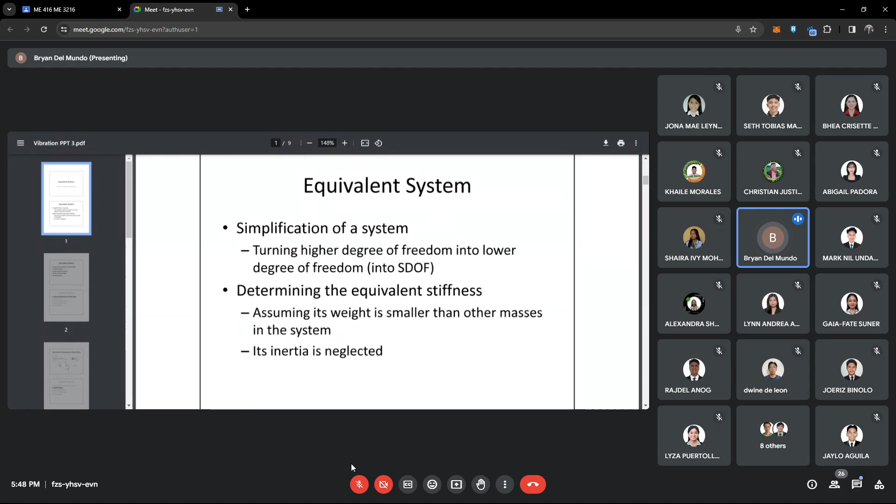So sa equivalent system natin, meron tayong extension or contraction of elastic rods. Ito yung common nakita niyo dun sa deformable. Then meron din tayong cantilever beam, simply supported beam, torsion of elastic rods, at floating bodies. Itong mga ito, before, nadaanan na natin sa deformable.

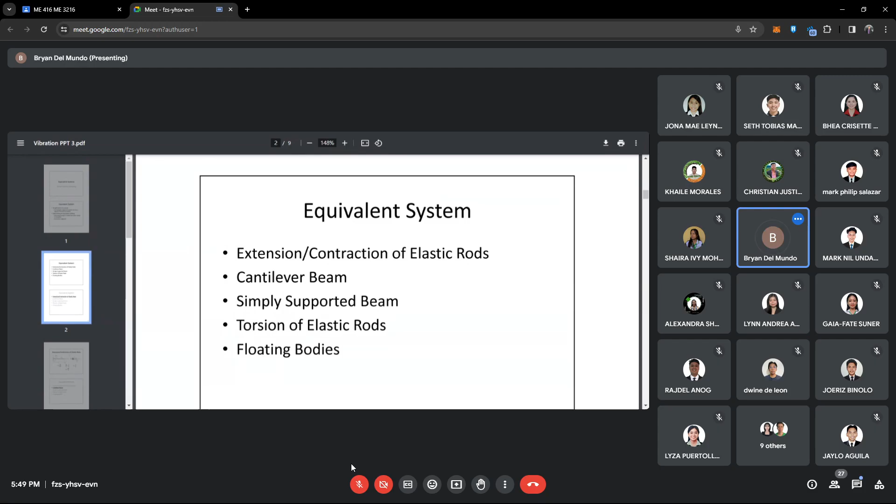So this time, apply natin siya as a spring. Pagdating niyo ng machine design, o kung nakapag-take na kayo, meron tayong tinatawag na cantilever spring at saka simply supported na leaf spring. Meron tayong simply supported at cantilever, pares pa rin naman yung kanilang value ng spring constant.

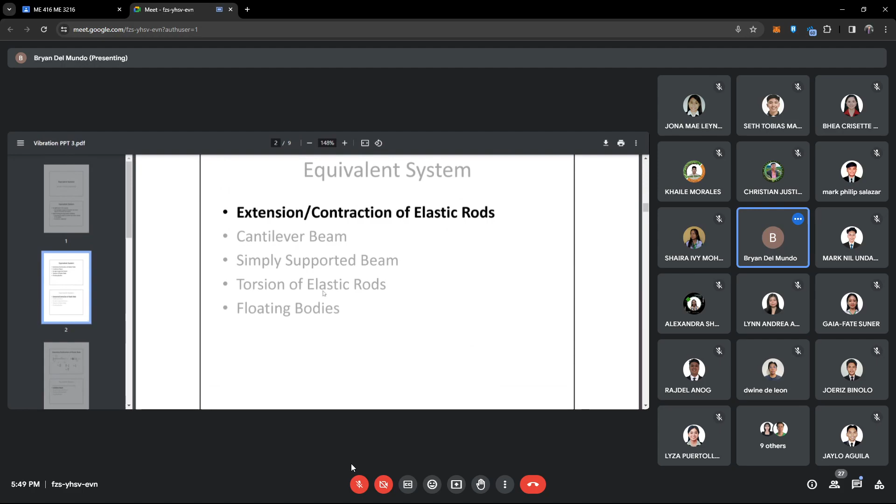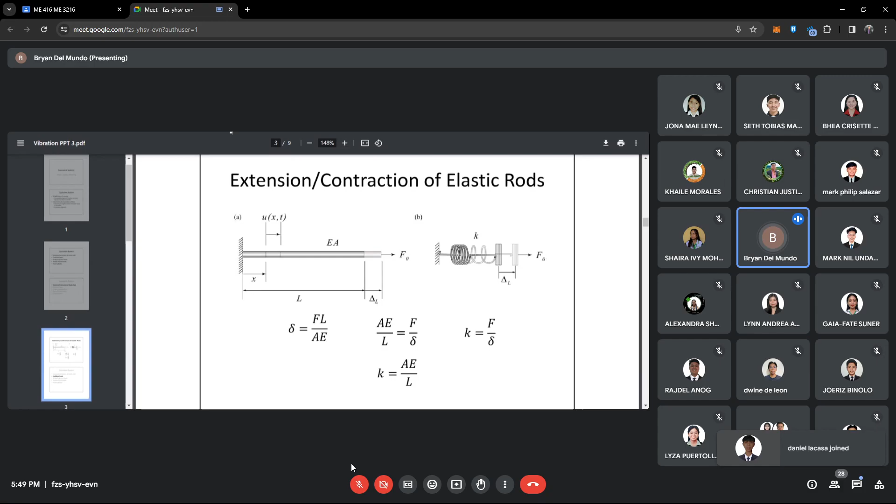So, extension or contraction of elastic rods. Dito, kung mapapansin niyo, meron tayong... i-share ko lang yung PDF natin.

Okay, so meron tayo dito rod, nakafix yung end niya. At yung force na nag-a-act natin dito, kung mapapansin niyo, ito FO. So pahila, meron tayo dyan, kumbaga ang nagiging deformation niya is in terms of tension. Pag nag-apply ka ng force dyan, since nakafix yung end natin, ang tendency, mag-deform yung rod.

Kaya meron tayo ditong deformation, yung deformation natin dyan. At meron tayong elasticity, mga modulus of elasticity ng ating material. At yung area, sabi ko, it's either circular or rectangular. Same pa rin naman yung ating formulas. Meron tayong deformation equivalent to FL over AE.

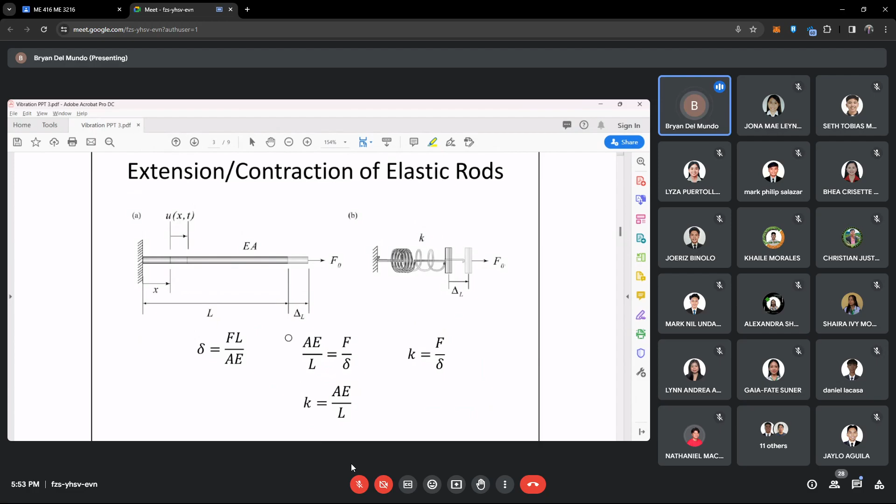So yun lang ang concept natin dito pagdating sa extension or contraction of elastic rods. Meron tayong tension or compressive force, at yun pa rin naman ang components natin. Meron lang tayong, parang nadagdag lang is meron tayong elasticity ng material.

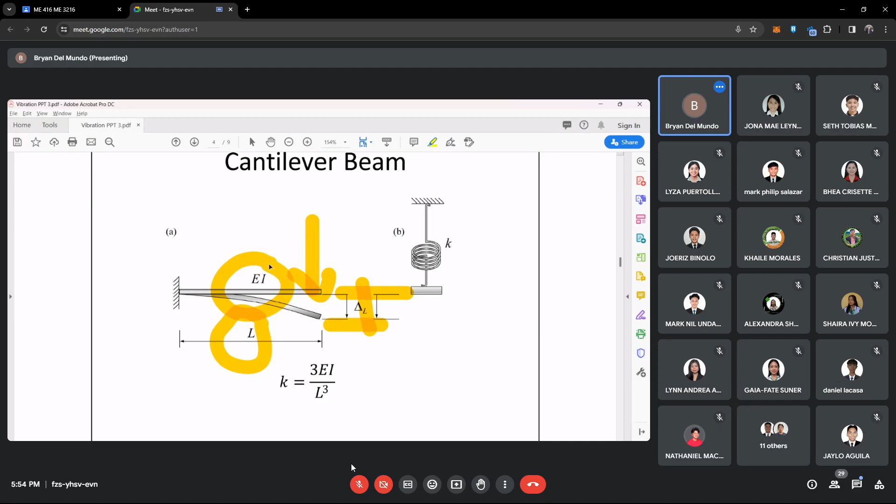So given the length of our cantilever, we still have elasticity and I. So our I here is the area moment of inertia. We have the same representation of I as area moment and mass moment. This time, it's the area moment that applies to us because it's the same concept as in our deformable materials.

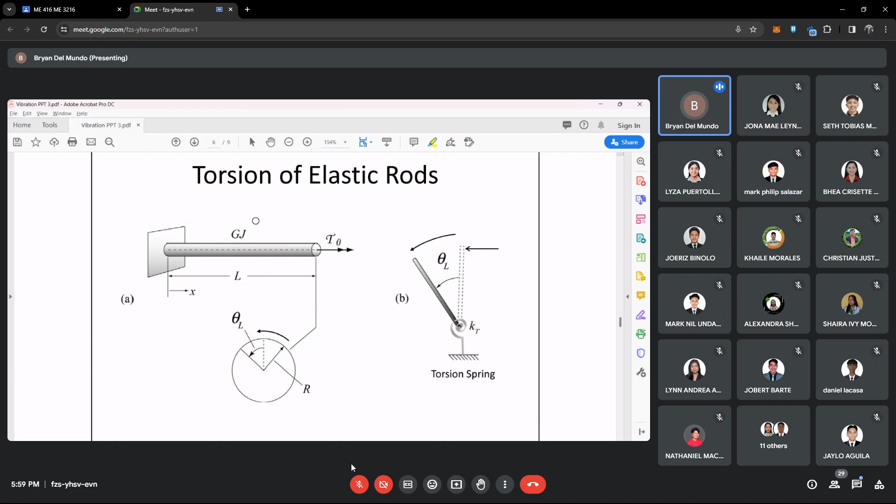So given our radius, what happens here is we now have a new component - JG, wherein our J is the polar moment of inertia. So don't get confused - when it's J, it's polar moment. When it's I, we have mass moment and area moment. Our G is the modulus of rigidity of our material - modulus of rigidity is different from modulus of elasticity.

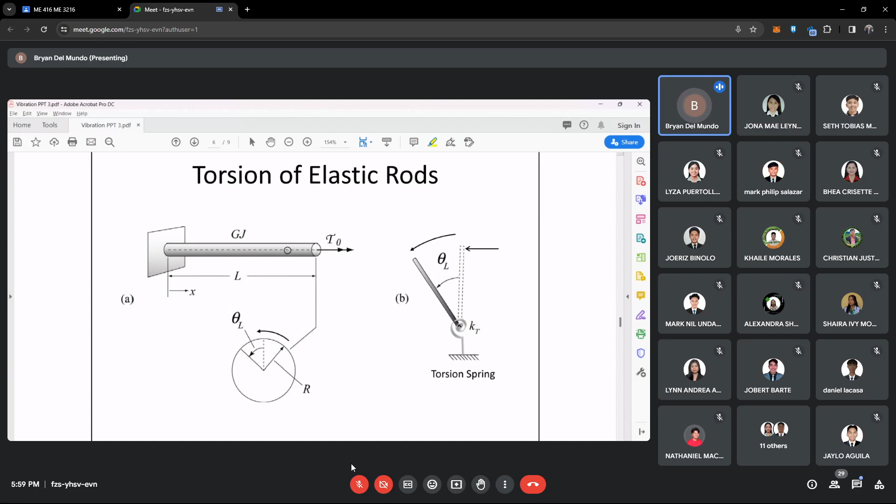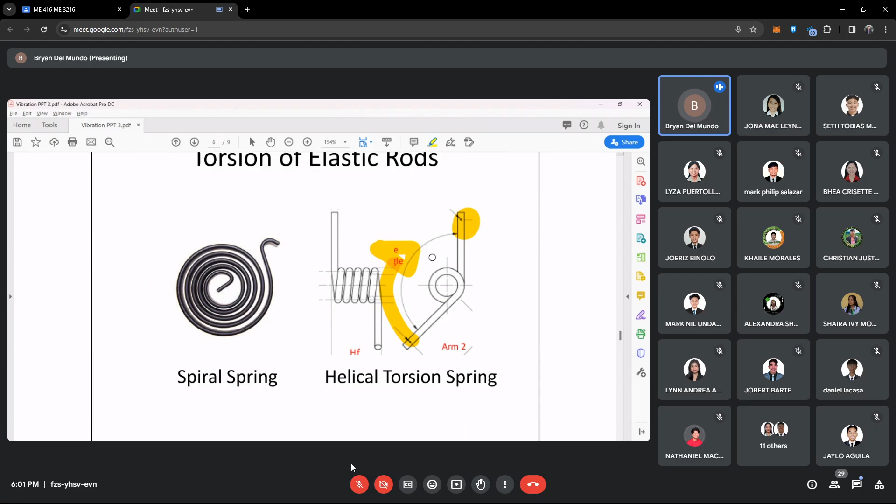And then, ito yung ating helical. Same lang naman sila ng concept, magkaiba lang sila ng itsura dito sa part na ito. Let's say for this one, nakafix ito, kasi kailangan nakafix lagi yan. Then nag-apply ka ng torque dito, so ganun pa rin. Pag binitawan mo yan, babalik lang siya dun sa kanyang original position.

And then, for torsion of elastic rods, Beta natin to. Ganun pa rin naman ang value ng ating K, F over deformation. So this time, since torsion nga yan, mapapansin nyo,

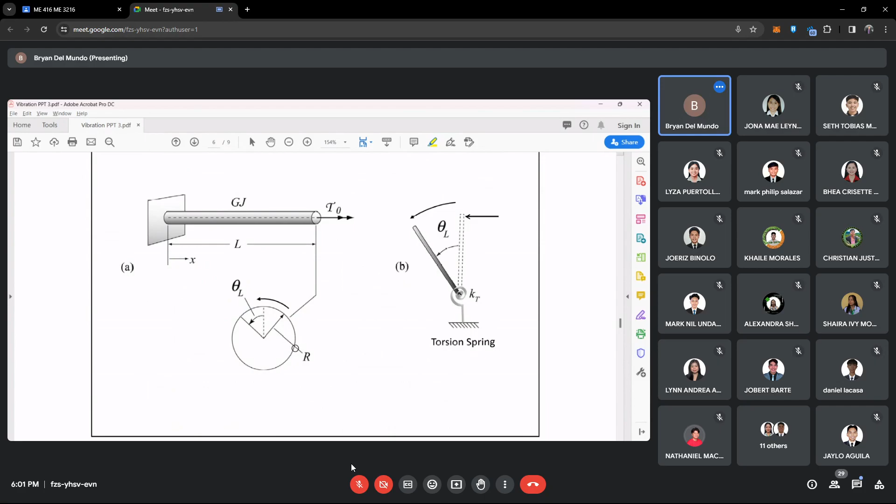kung mapapansin nyo, yung kanyang deformation niya dito is naka-angle theta. Ibig sabihin curvilinear na siya, hindi na siya kagaya ng mga nauna na ang deformation is linear. Ito, sa example natin is para siyang spring mass model. Ito yung mga nauna wherein yung kanyang deformation is linear, kaya yung kanyang K is F over yung deformation na linear.

And then pag torsion naman, ano? So kung sa linear meron tayong F over deformation, pagdating naman doon sa kanyang torsion, yung value ng stiffness ng ating spring is meron tayong torque. Yung torque yung nag-a-act over yung ating theta na angular deformation.

So that T or yung ating torque, ano? Torque yan, hindi siya tension. Wherein yung ating torque is equivalent to yung ating K multiplied by theta, wherein theta is in radians. Lagi naka-radians yan.

So at vibration, meron tayong formula dito. Summation, moment at point O, counterclockwise direction, so same pa rin naman is equals to I alpha. So IM yan, since yung I naman natin na ginagamit dito is yung mass moment of inertia. Kapag ka nagmo-moment, so yung formula ng moment na I alpha, yung I niya is in mass moment of inertia.

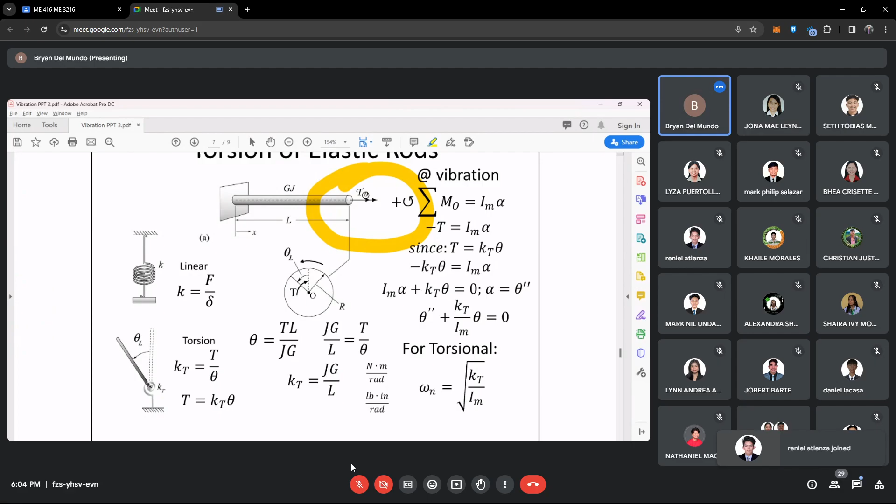Okay. So since T is equals ito, galing dito, so K theta. Substitute itong value na to dito sa ating torque, so that we have here our value negative K sub T or yung ating stiffness times theta is equivalent to I alpha.

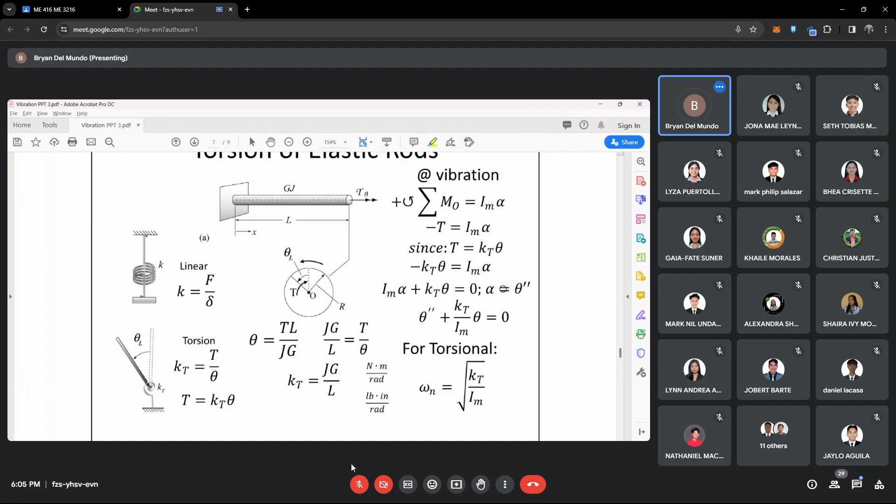So yung alpha natin is also equal dito sa ating second derivative ng ating theta o displacement or deformation. Since alpha is equivalent to theta double prime, substitute lang ulit natin to this one. Pagka-substitute natin dyan, lipat lang natin yung, transposition lang yung nangyari dyan.

So sabi nga nung una, yung value ng ating omega n is kung ano yung katabi nitong ating theta. So meron tayong formula dito ng ating omega n is equivalent to square root of kT over Im. So meron na tayong tatlong value ng omega n.

So hindi kasama sa vibration of rigid bodies kasi hindi siya totally fixed, kasi nagbabago yung depende dun sa figure ng ating given na figure. So yung sa ating spring mass model, meron tayong K over M.

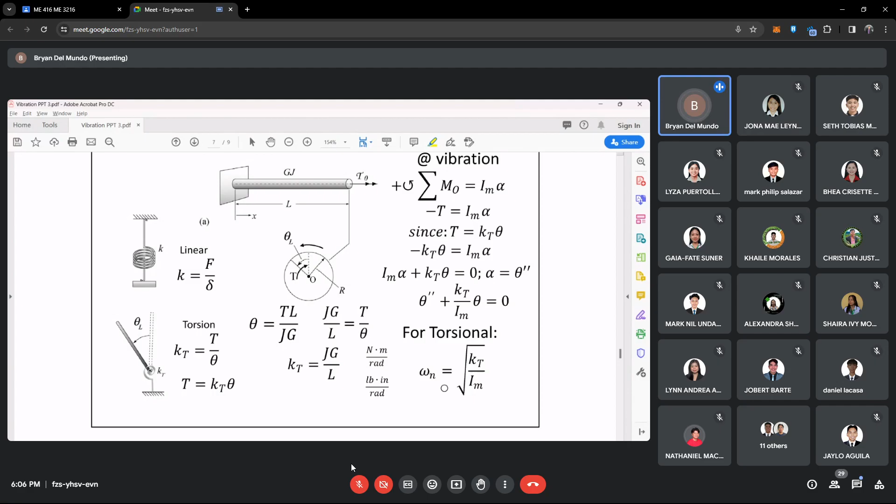So pag linear, K over M. Then kapag ka naman dun sa ating simple pendulum, meron tayong square root of G over L. So kapag yan ay torsional, meron tayong K over Im, o yung ating mass moment of inertia.

Wherein yung unit ng ating K is this one. So sabi nga is mapapansin nyo yung torque. Dalawang unit ng ating torque, it's either Newton meter or inch pound, or pound inch pag English. So over theta, since may theta sa ilalim, automatic meron niyang radian sa ilalim. So lagi ito kapag torsional, lagi siya may radian sa ilalim, yung K.

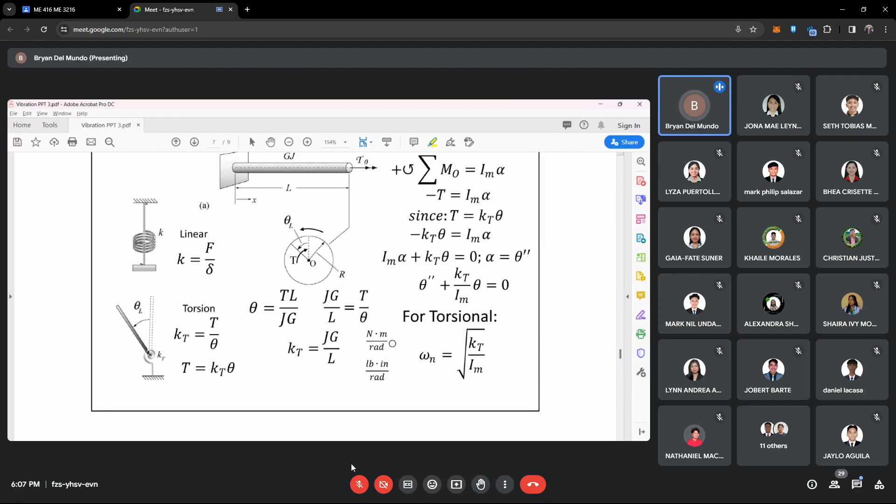Since yung ating formula nga is merong theta sa ilalim, T over theta. So yung radian kasi minsan nawawala, minsan bumabalik. Basta ang formula natin ay ganyan, automatic meron tayong radian. Sabi ko na una, ang radian is para siyang unitless, kaya bigla siya nawawala, minsan bigla din bumabalik.

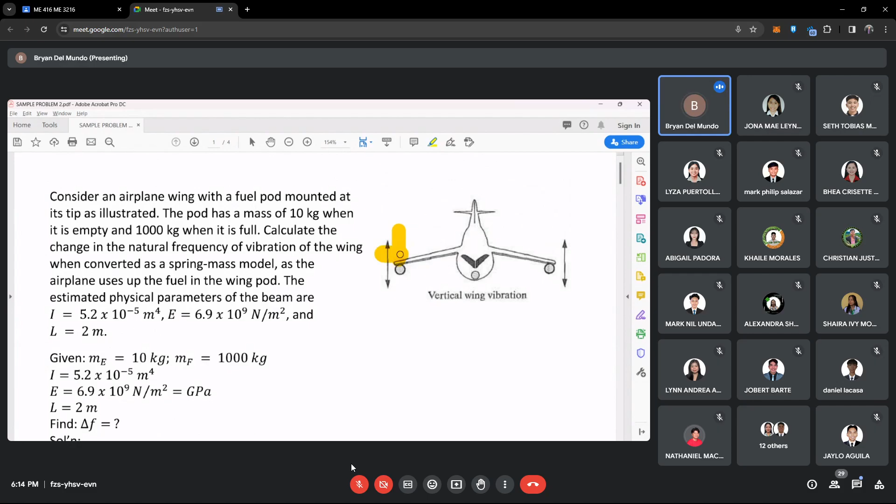When converted as a spring mass model, so this time kung mapapansin nyo, itong part na ito is naka-fix. So yung ating wing. And then meron ditong mass na nag-aact sa magkabila. So considering this one as yung ating, kung mapapansin nyo, parang similar siya dun sa ating cantilever beam. Kasi dito naka-fix yung end natin dito. And then sa dulo, may nag-act na force or mass. So same siya ng concept dun sa ating cantilever beam. So ang nangyari sa ating problem, so habang lumilipad siya, nagko-consume siya ng fuel.

So ibig sabihin gumagaan. And then, since meron tayong mass dito, ang nangyari, nagbabibrate yung kanyang wing. Ang tanong sa atin ngayon is, ano yung change in frequency? Or itong delta F. So change in frequency ang ating hahanapin. So gagamitin lang natin yung ating conditions na, so kapag daw siya ay empty, so when M is empty, when yung pod is empty, M is equals to 10 kilograms, and then when tank is full, so its mass is 1,000 kilograms. Then we have here our parameters, so I, E, and L.

So solution. So solve muna natin yung ating K, or yung ating, we need to solve for the stiffness of the spring or nitong ating cantilever beam. And then, so we have here our formula. K is equals to 3EI over L cube. So 3 times E, wherein our elasticity is 6.9 times 10 raised to 9 Newton per square meter or Pascal. So hindi ko na siya ginawang Pascal kasi para mas makapag-unit analysis tayo. Times yung ating I na 5.2 times 10 raised to negative 5 m raised to 4 over L cube.

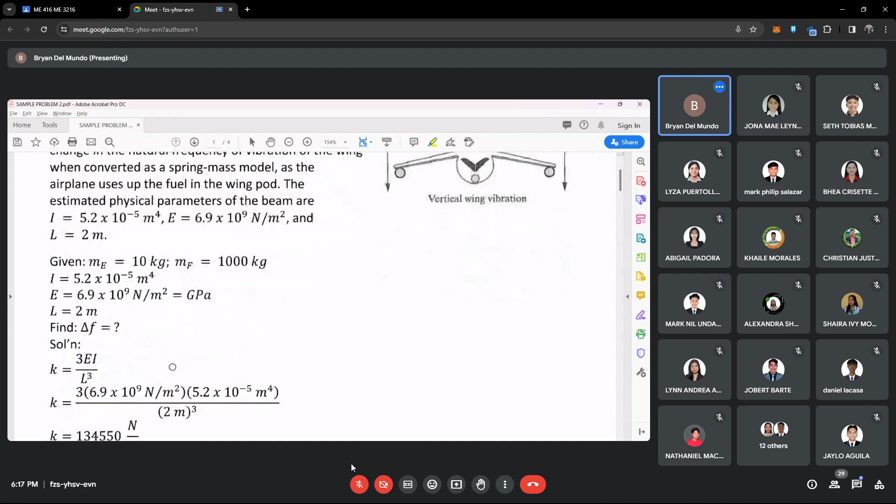Since we have our value of K, we can now solve for omega n. Why does it become square root of K over M? You'll notice in this problem, we need to calculate the change in natural frequency of vibration of the wing when converted as a spring mass model. That's why we used omega n equals square root of K over M.

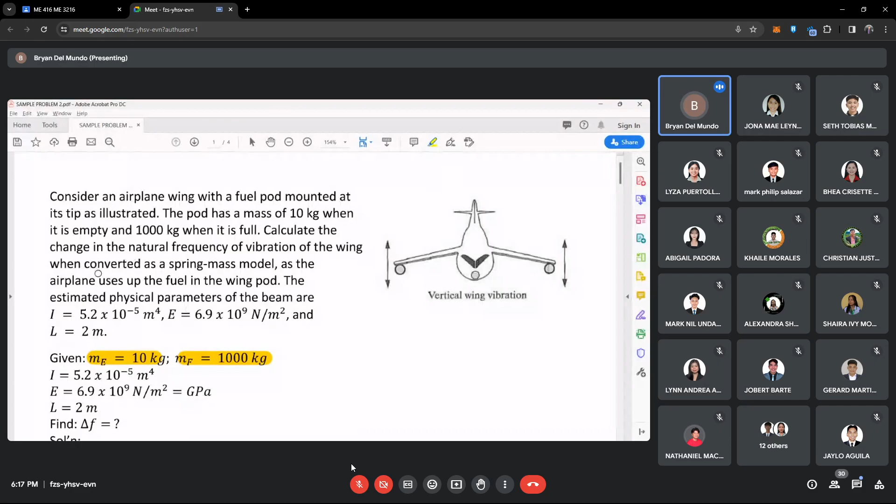We need to evaluate for both conditions - when the fuel tank is empty and when it is full. When empty, it has 10 kilograms, and when full, it has 1,000 kilograms. What we're looking for is the change in frequency, so we just need to solve for the frequency when the given mass is 10 kilograms, and when the tank is full.

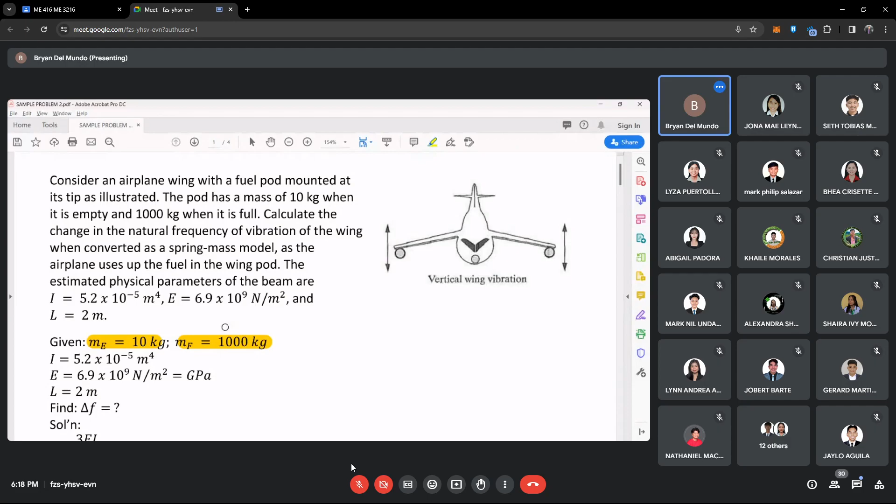For empty, we have the value of K, 134,550 over 10 kilograms. So we have here our value of omega n, 115.9957 radian per seconds.

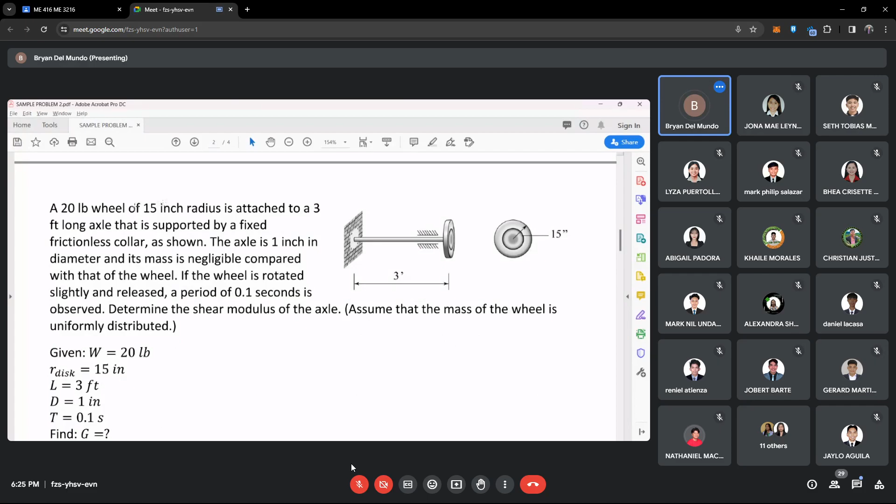Let me pass this to you first. A 20-pound wheel of 15-inch radius is attached to a 3 feet long axle that is supported by a frictionless... okay, let's proceed, this is a new condition now.

A 20-pound wheel of 15-inch radius is attached to a 3 feet long axle. This one is our axle, and it is fixed at this part - fixed at end by a fixed frictionless collar. This is the end. The axle is 1 inch in diameter.

Its mass is negligible compared with that of the wheel. It's also stated that the mass of the axle is negligible, similar to what we said earlier - when we evaluate the equivalent system, we assume the mass of the system is lower in value compared to its weight, or compared to other acting mass. So it's either negligible or its value is very small.

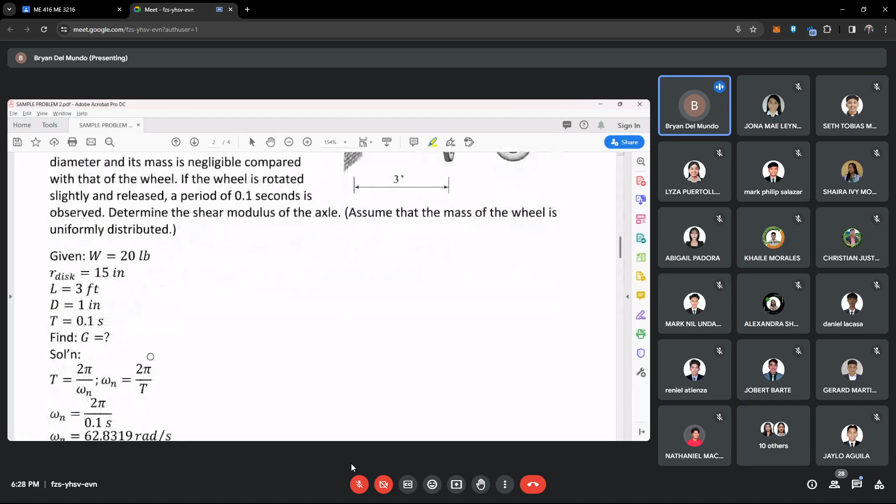So find G. Since meron tayo ditong given na ating period, hanapin muna natin yung value ni omega n. To find the value of omega n, we have here our formula of period is 2 pi over omega n. So substitute, cross multiply, derive the equation. So we have here our formula of omega n is equivalent to 2 pi over T, where T is yung period. So we have our equation, omega n is equals to 2 pi over 0.1 seconds, so that we can get our value of omega n here as 62.8319 radian per second.

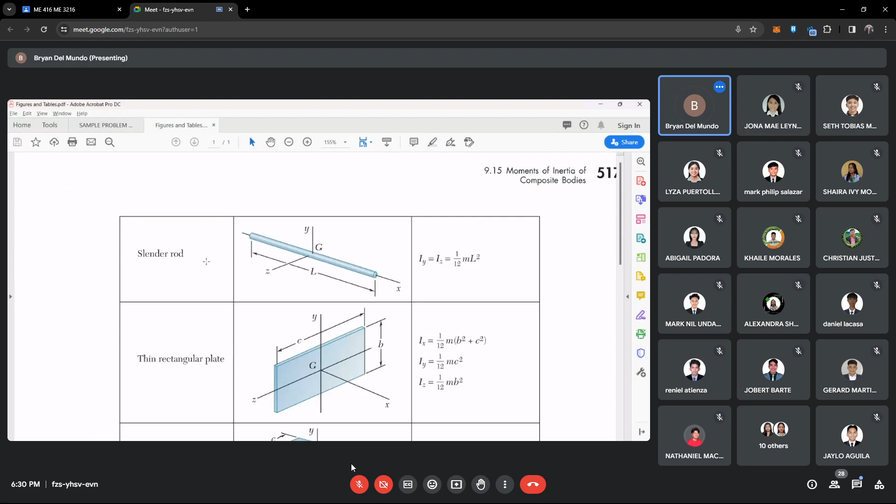So since we have here our value of omega n, we can now find the value of Im and yung K. Since hindi given yung ating Im, wait lang, share natin yung isang table. Okay, so hindi given si stiffness or yung K, hindi rin given itong ating Im, but we can solve the value of mass moment of inertia.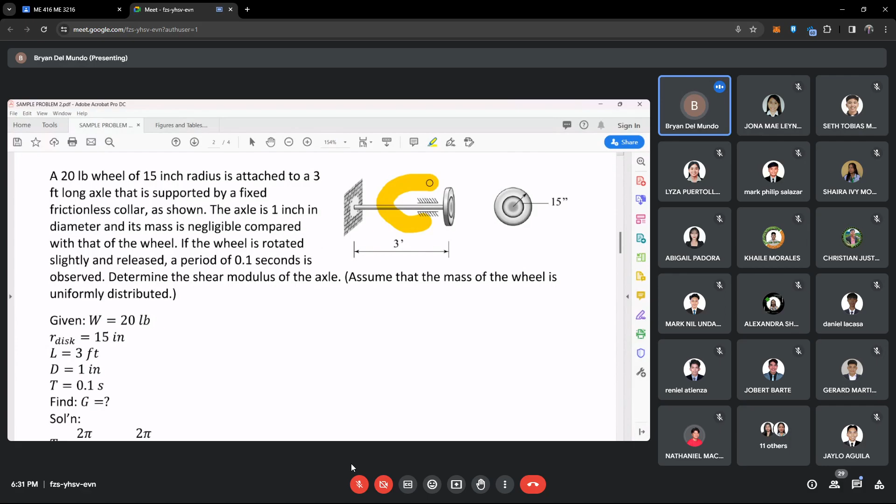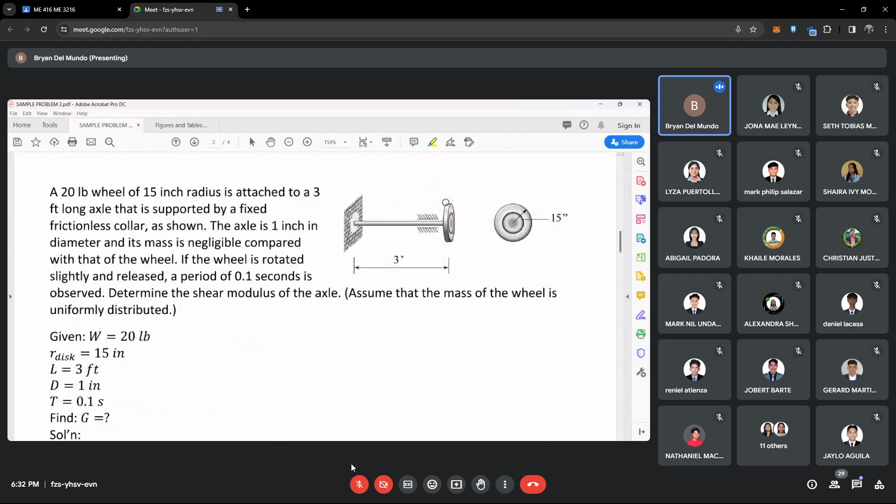Papasok pa doon, and then so we can now solve for the value of I. So 1/2 M, since our given here is naka-pounds, we need to divide it to our value of acceleration due to gravity, or yung ating 32.2 feet per second square, to make it mass, and then times r squared. Since our given here ng ating radius is in inches, we need to convert yung ating inch so that makakancel yung ating inch, we have here the value of F or feet. So cancel itong ating FT, so matitira na lang is itong ating pounds and per second square, but meron diyang matitirang isang feet sa taas, kasi ito ay naka-square. So solve natin, so meron tayong makukuha value ng I, which is equivalent to 0.4852 pound feet second square. Tandaan ng ating unit ng I, pound feet second square.

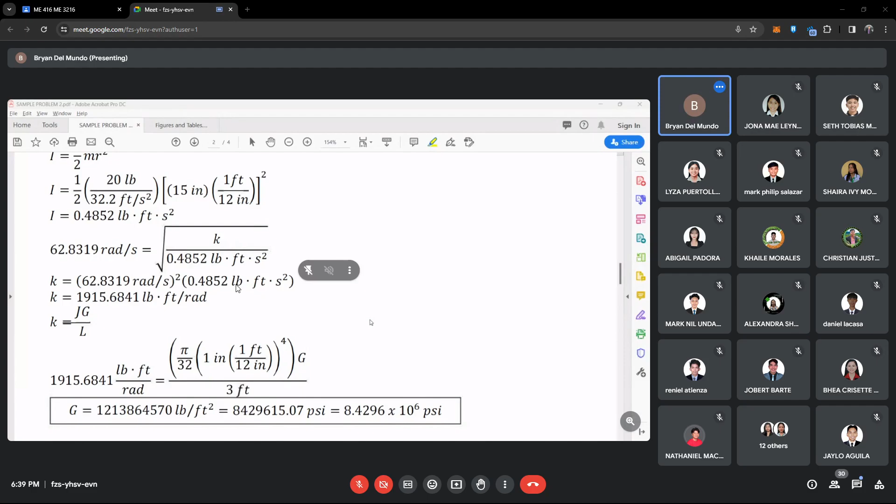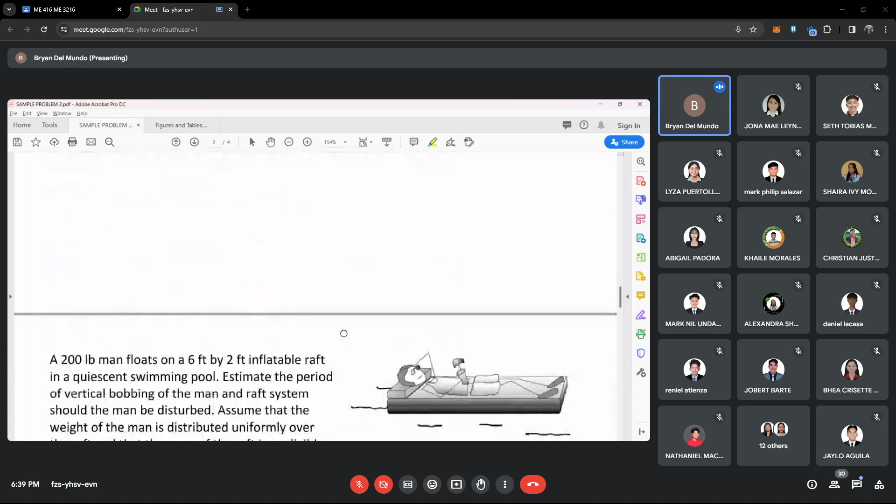So next problem. For example, in our sample problem: a 200-pound man floats on a 6 feet by 2 feet inflatable raft in a quiescent swimming pool. Estimate the period of vertical bobbing of the man and the raft system should the man be disturbed. Assume that the weight of the man is distributed uniformly over the raft and that the mass of the raft is negligible. So our system here is the raft.

And we have our given mass for the man lying down - we have given 200 pounds. So given: weight equals 200 pounds, and area is 6 feet by 2 feet. And find the period - estimate the period of vertical bobbing. The tendency of this is to move up and down, especially when there are waves or when the liquid moves.

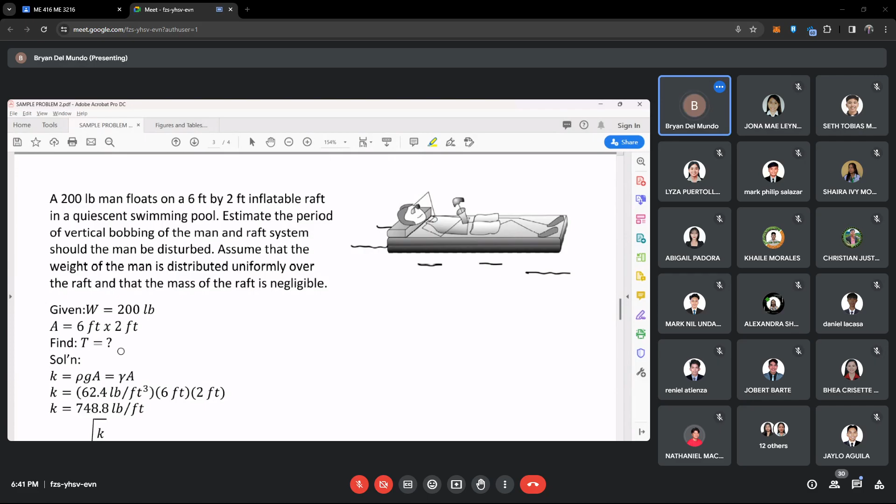So we have here our formula K is equal to rho GA. Since our units here are in English units, the formula is the same. So rho GA is equivalent to specific weight times area.

The specific weight is equivalent to the mass density of our liquid multiplied by acceleration due to gravity. Since the given here is in English units, the density we will use is 62.4 pounds per cubic feet. This is our density.

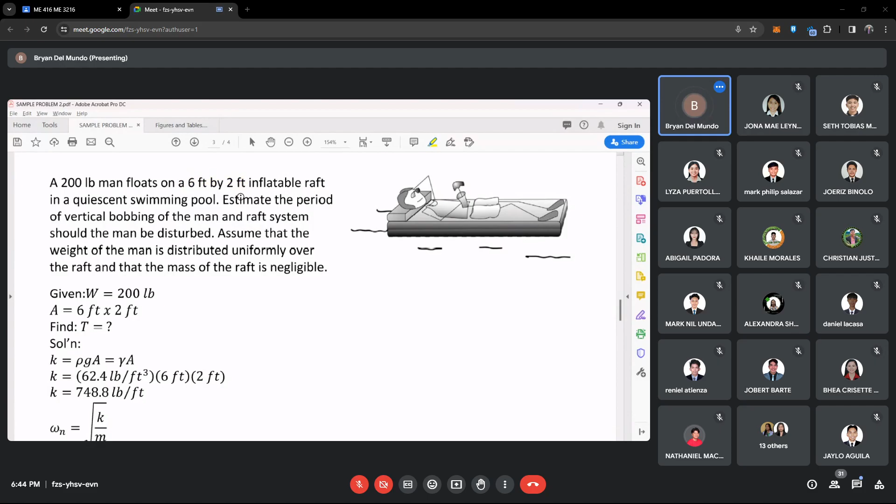So gamma times area. Our specific weight for English units is 62.4 pounds per cubic feet, multiplied by 6 feet times 2 feet to get our area, since our given dimensions are 6 feet by 2 feet. So we can now find the value of K. K is equivalent to 748.8 pounds per feet.

Since we have the value of K, and the weight is given, we can now solve for the value of omega n. Sir, why does K become square root of K over M again?

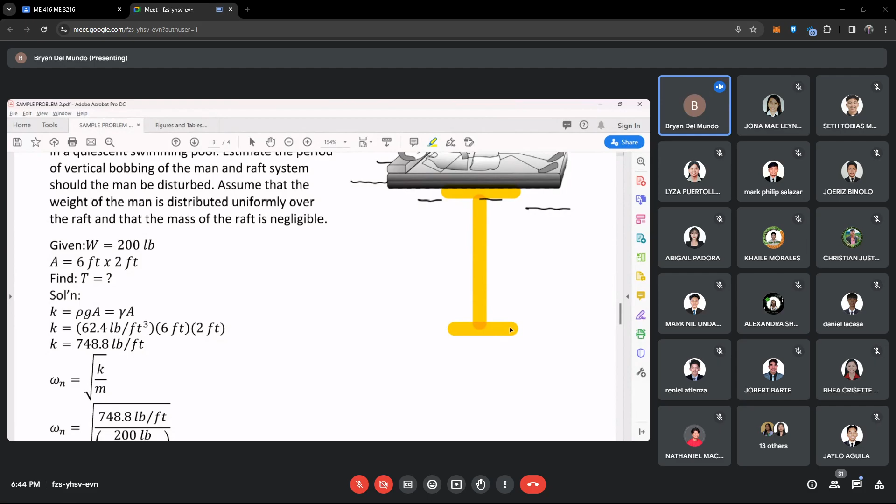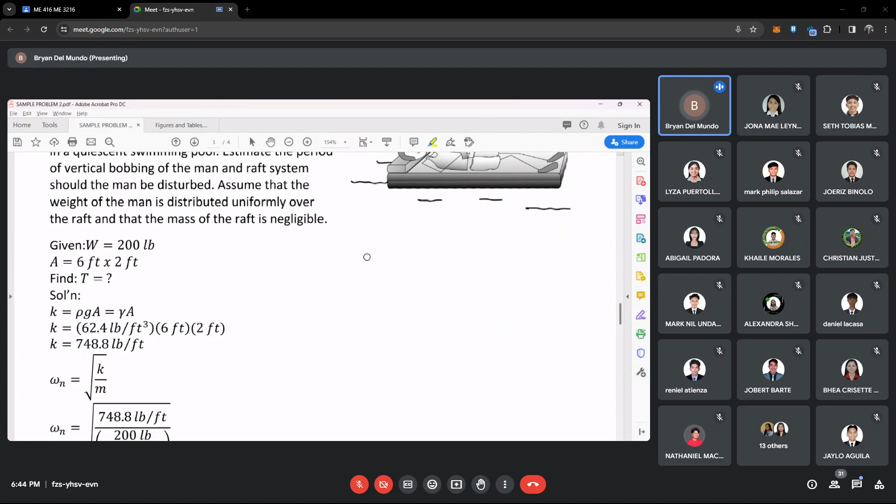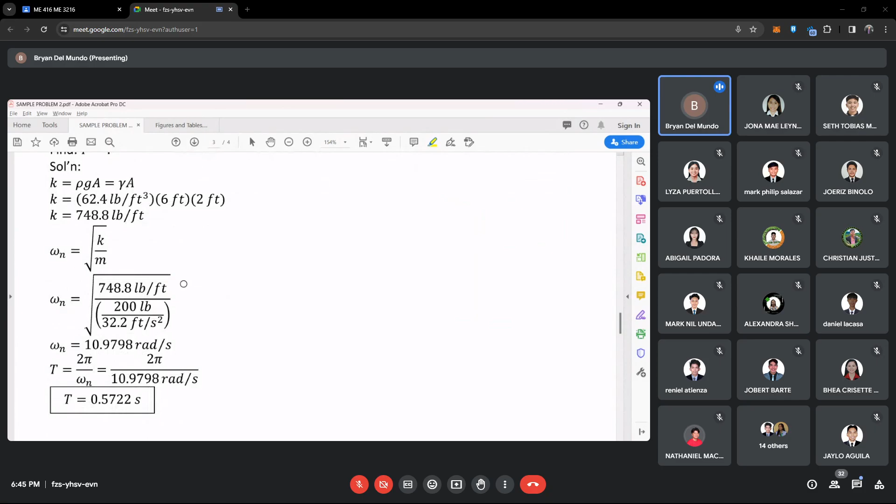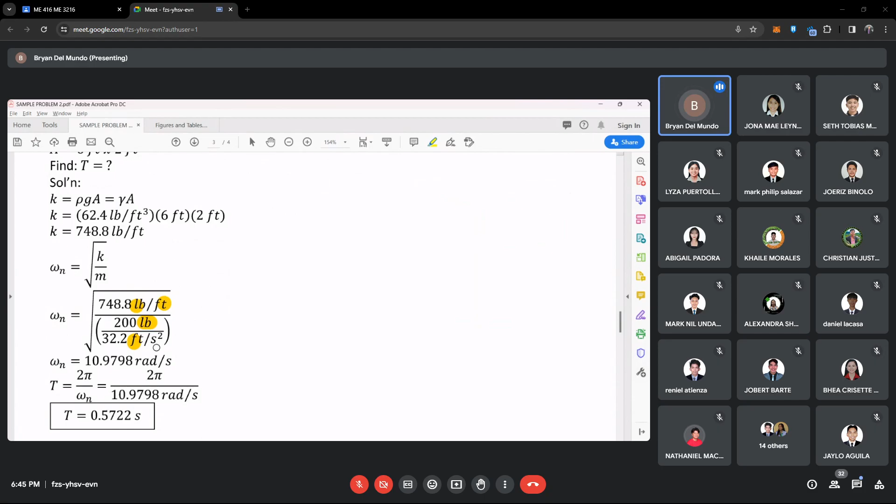So the value of our omega n is square root of K over M, where K is 748.8 pounds per feet. For our M, since it's given in pounds, we always divide by 32.2 feet per second squared when it's in English units, because we can treat pounds as force. We just divide it by 32.2 feet per second squared, so that cancels our pounds and feet, leaving per second squared.

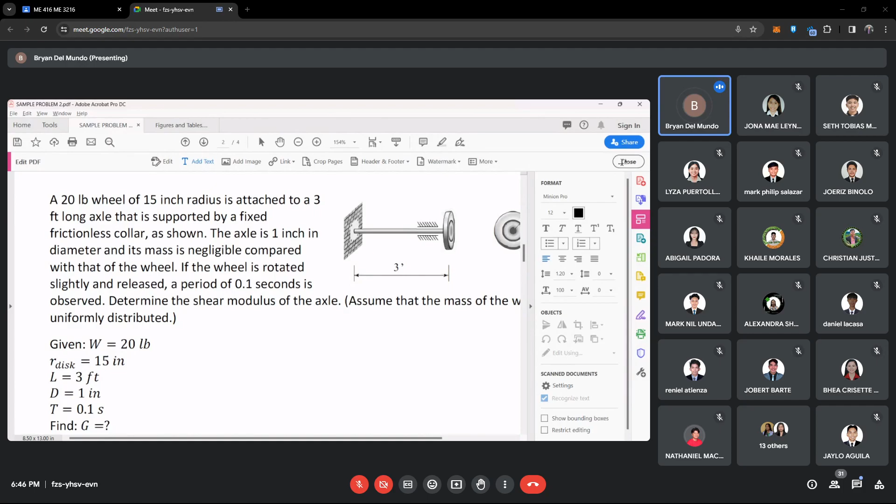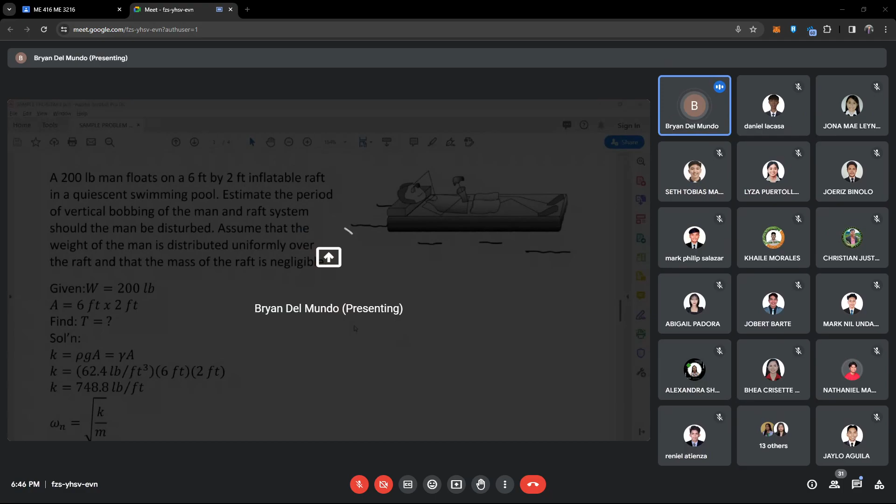Moving on, the formula for our period is 2 pi over omega n, so we can now get our period: 2 pi over 10.9798 radians per second. Our period value is equivalent to 0.5722 seconds.